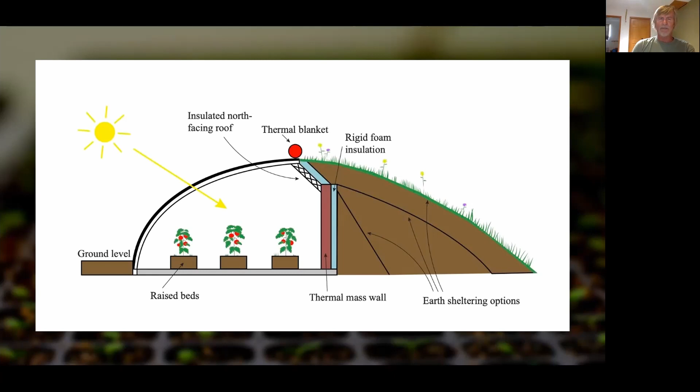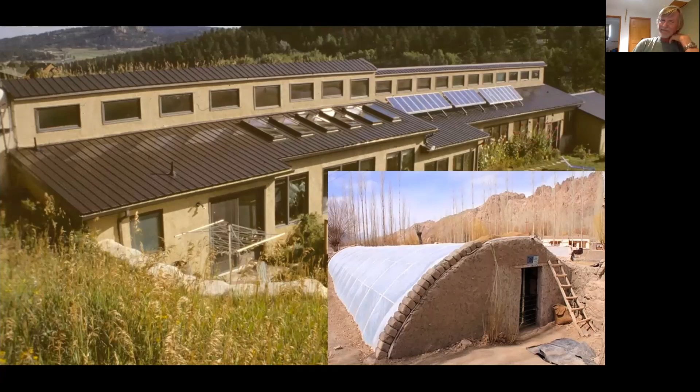So these structures are very equivalent. The Chinese greenhouse on the bottom right, and this passive solar home in Evergreen, Colorado on the left. As I said, very different from a traditional greenhouse. You really couldn't design a more energy inefficient structure than a conventional greenhouse. Maybe the only thing less efficient is a tent. They're just really not designed for energy efficiency. Most greenhouses are designed to allow people to start growing early in the spring, or maybe mid-spring, so they have their seedlings and whatnot ready to put out in their gardens in the summer. And some people grow through the summer and into the fall, but they're basically not designed for winter use without the addition of tons of supplemental heat.

So back to the Chinese greenhouse. This is really what we've just said. They're designed to grow warm weather fruits and vegetables throughout the winter, using only solar energy, typically earth sheltered. If you don't have a site that has at least a 10% slope to it, you can berm them. When you excavate, you can use that supplemental dirt to berm the structure so it's earth sheltered. Long axis oriented east and west. They're insulated at night. Now that's an important thing. So on a cold winter night, you want to be able to pull some insulation down over that glass, or in this case, under that glazing, to hold that heat in. And they're built with thermal mass to retain that heat, built airtight.

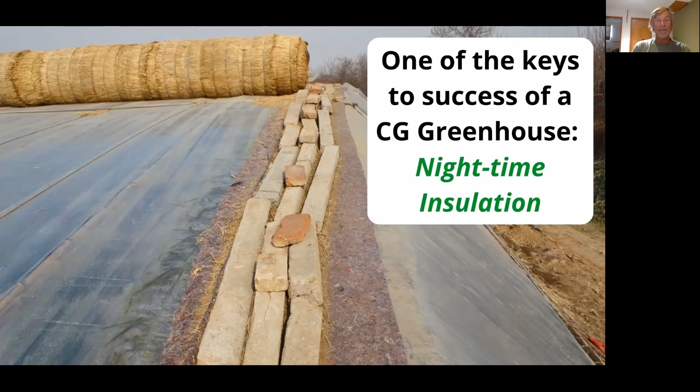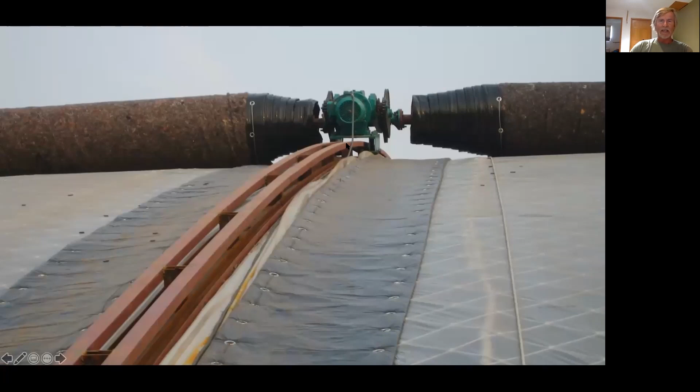And then they've gone to synthetic fabrics to try to hold that heat in. At this point, they were still manually raising and lowering them, which is a lot of work. And then they designed technology to help raise and lower that insulation blanket with electricity. Much smarter way to do it. Okay. Now, on your greenhouse, if you're going to build one, one of the things that you can do, and one of the things that we did, is you can install an insulation blanket, and we have an interior insulation blanket, but we also installed some polycarbonate.

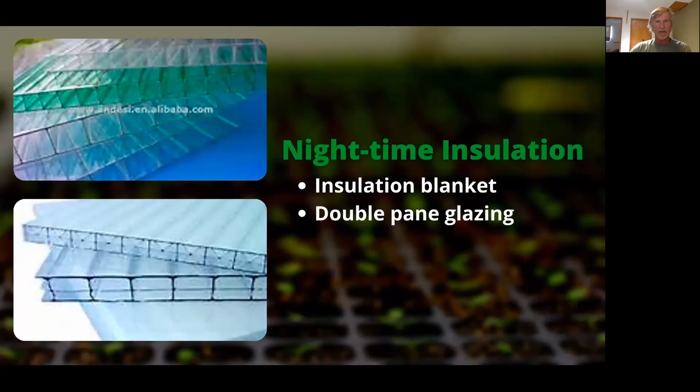Now here's ours. We basically strung an insulation material called, the one we use, the name's slipping my mind right now, Aluminet. It's an aluminized shade cloth. I think this one's polypropylene or polyethylene, treated with UV resistant materials. And what we did is we suspended it above some cable, and so we can raise and lower it. This is actually conventional shade cloth that you're looking at, but that can be lowered at night to help hold the heat in. And that's the big challenge, keeping that greenhouse warm at night.

Now, this is that Chinese greenhouse I showed you earlier, the one that was above ground, beautiful. They got a beautiful growing operation in there, but they used a product similar to Aluminet called TICS. It's Tempa Interior Climate Screen. I prefer Aluminet because there are places online where you can order it in multiple sizes. It comes with grommets, and it's much easier. This is the stuff I'm talking about. This is Aluminet. This is what I replaced our conventional shade cloth with.

It's a reflective barrier. Most of your heat loss in a greenhouse at night is infrared, okay? Infrared radiation. So by placing a radiant barrier essentially between the greenhouse and the glazing or glass or plastic, you now are able to reflect a lot of that heat back into the greenhouse. So that's really important. It's not really a great insulator in the sense of what insulation does, but it does prevent that main source of heat loss, which is IR radiation.

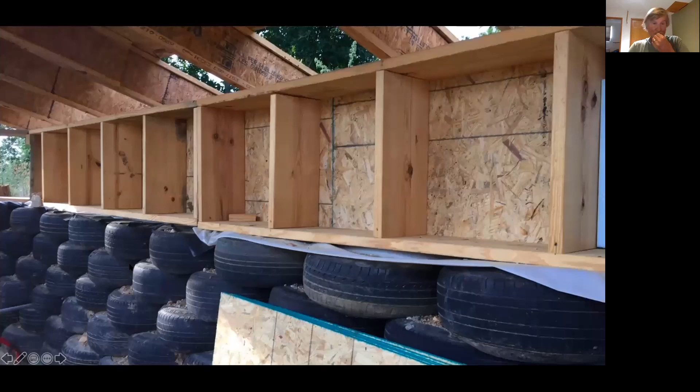Now, when we built ours, you're looking at the inside of the north-facing wall. We used rammed earth tires. My house in Evergreen, Colorado, is a rammed earth tire home. I decided, I don't know who the we is, I decided to do the same thing in Missouri. And there's a whole story behind that. It's a nice, convenient way to put tires to good use. It's a lot of work, but the work can be lessened, but that's not the point of this slide. Just to let you know, we did it this time. Were I to do it again, I'd choose another material, and I'll show you that later.

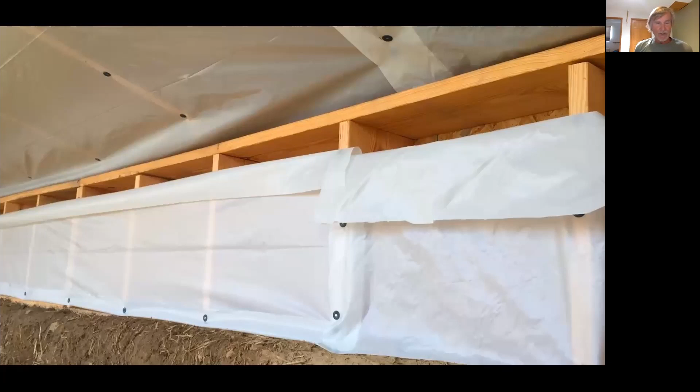But notice, this is the north facing wall, and on the outside, it's waterproofed all the way to the top and bermed almost to the very top of that wall. But that's a 12-inch deep cavity, which we packed with cellulose. We also used TJIs in the roof, which were left over from building our house. And so we have also 12 inches of dense packed cellulose in the ceiling. So once we framed it up, you can see we're starting to plaster the wall down below.

Can you see my arrow, or can you see my pointer when I point things out? Can you see that, like right on the white spot? Am I wasting my time doing that? Probably can't. And we can see it. Yeah, okay. We see it.

All right, so you can see that we've started to plaster here, but what we did is we put 2 layers of 11 mil polyethylene. We nailed it to the frame. We did the same thing in the roof, and then we packed it with insulation. Now, I also used some of this Reflectix type insulation. It's an insulated bubble wrap, essentially.

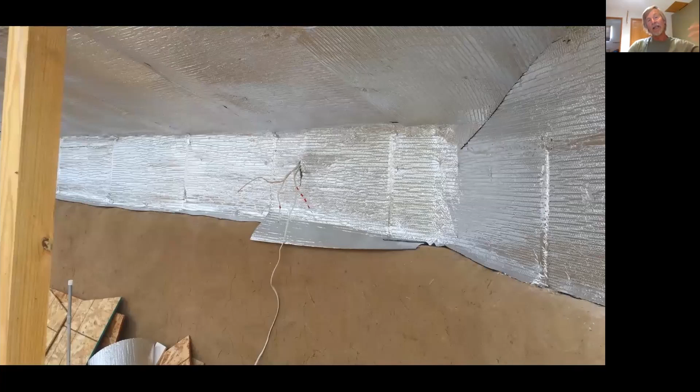So after we had filled that cavity with insulation, we applied painted OSB just to help reduce water penetration. And then we taped all the seams, and then we placed this reflective material over that to provide yet another level of insulation and some reflection to keep the back of the greenhouse brighter. So that's insulation. Basically any wall that's not thermal mass and not plastic to let light in should be insulated. And you want to insulate the glazing as well.

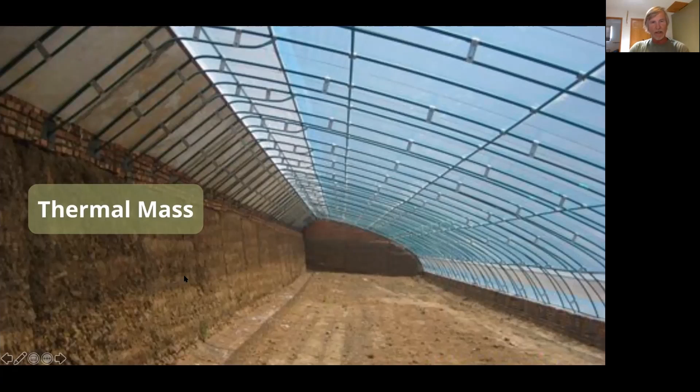Now in China, they go very deep into the earth. You can see how deep they are. I don't know, that must be 8 to 10 feet deep into the earth. And they don't typically add a lot of thermal mass. They use thermal mass from the soil, but they'll also often put a parge coat, a coat of concrete, as you can see here, over that back wall, and that serves as some thermal mass. They've got a walkway here, which adds thermal mass, and then the soil in here supplies additional thermal mass.

So very lovely structure, very, very nice way of growing food. So we decided, though, or I decided, as I mentioned earlier, to use rammed earth tires. We built this, and I can't remember when we started doing the tire packing, it was like 2016. It was just an absolutely miserably hot, humid summer. We'd start at 6:30 in the morning, and by 11, we just had to quit.

So Dan got to thinking, maybe we better do something to cool us too. So we put in an earth cooling tube. This is 4-inch PVC, and we ran it. See if I've got the pictures. No, I don't. We ran it underground about 100 feet. We got a mini excavator, and we excavated a trench about 100 feet out into a pasture, laid this pipe in it, made sure that it sloped downhill the whole way, so if any moisture condensed in there, it would drain out. And then we daylighted it out in the pasture.

And so we just did that as an experiment while we were building, and we ran a little test. It was 104 degrees out when we ran the test. We put a little solar-powered DC fan on that, and the air coming through that earth cooling tube was 80 degrees. So it really, really worked well. And as a result of that experiment, we put another one in. We installed a 6-inch earth cooling tube on the other side of the greenhouse that runs about 130 feet into another pasture, and we dug that down even deeper, about 7 or 8 feet deep.

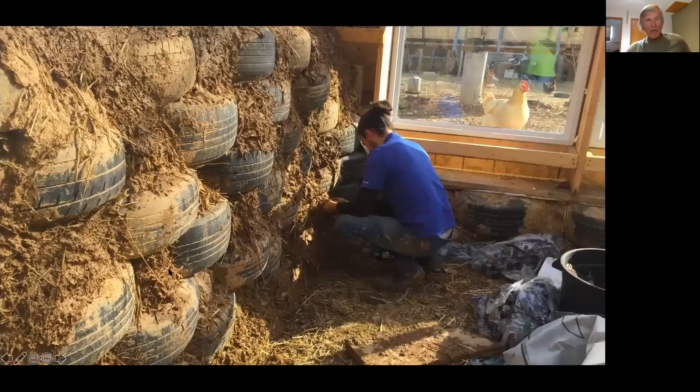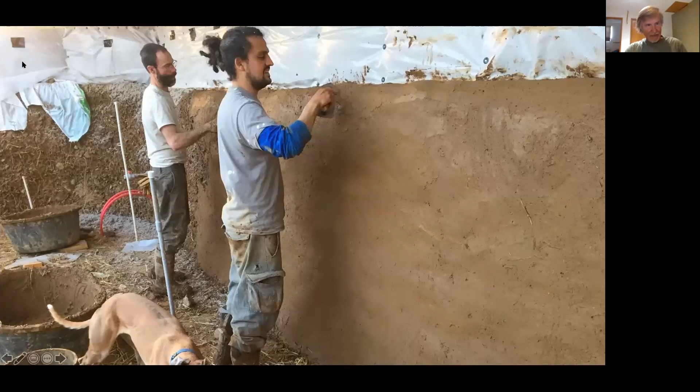Here we are. We're framed in. We've got the glass, the windows in. Notice there's a chicken always inspecting our work. And we're beginning to plaster those rammed earth tire walls. Here's a couple of my workers plastering that back wall. You can see these are all jam-packed with insulation. You can see these cavities here to the left of this other worker.

And if I were to do it again, I would probably opt for something like this. These are those monster bin blocks. Almost all concrete companies, people who send trucks of concrete out to job sites, make these bin blocks out of waste concrete. Truck comes back with a couple yards of concrete, or a half a yard. They pour them in these molds and make these lovely blocks.

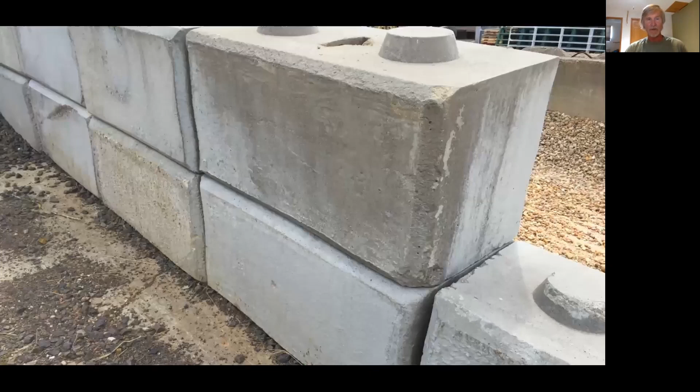We took 2 summers and part of a winter to pack those tires. There were only 200 in our structure, and I was in my late 60s, so I wasn't doing a whole lot in any one day. But we could have basically brought these in and built the walls in a week at the very most. So those are bin blocks. I'd really seriously encourage you to think about using them.

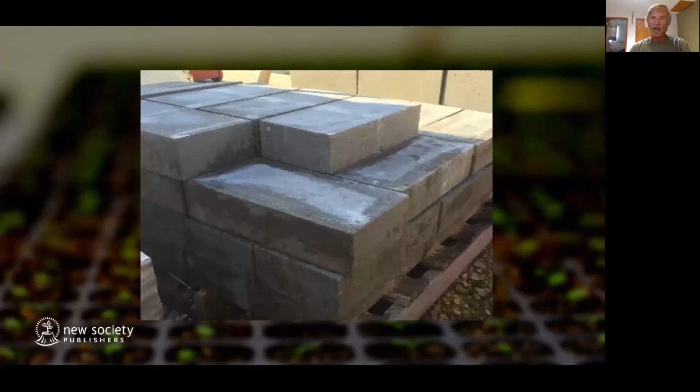You can use cement blocks. You want to fill them with a mass material, either sand or concrete, so you increase the thermal mass. You could use solid cement blocks. They're kind of airy. They're not as good a thermal mass as say a bin block. All right, so now everybody got that. So thermal mass really, really is important.

And I should mention that the reason for that is I also have 2 aquaponics systems set up in my greenhouse. So I've got 7 tanks of about 200 gallons full of fish and water and plants growing in them. And so there's a lot of moisture in my greenhouse. So I've installed a lot of DC fans to move that moisture, to move the air around. And so just keep in mind that if you start to incorporate things like hydroponics or aquaponics into a Chinese greenhouse, you'll have more moisture to deal with.

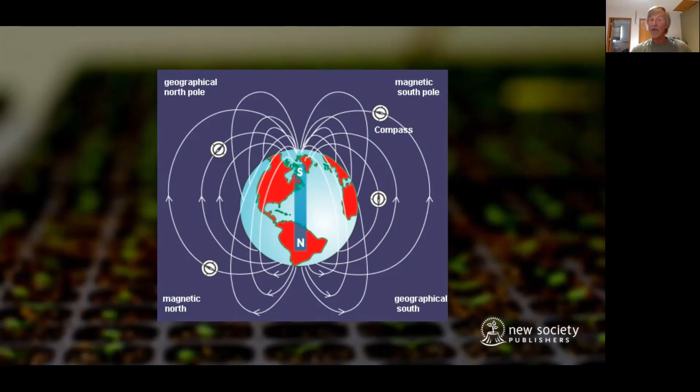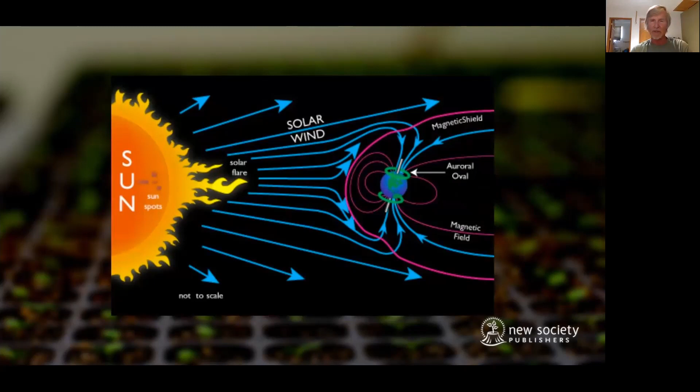So there is a North Pole and South Pole, but here's the thing, and again, I'm sorry if I'm telling you stuff you already know, but it's a beautiful slide anyway, it's kind of fun to review this, but magnetic north and south don't always follow true north and south. Okay, there's that picture showing how that magnetic field prevents us from being bombarded by this corpuscular radiation, alpha particles and whatnot. But true south and magnetic north and south rarely coincide.

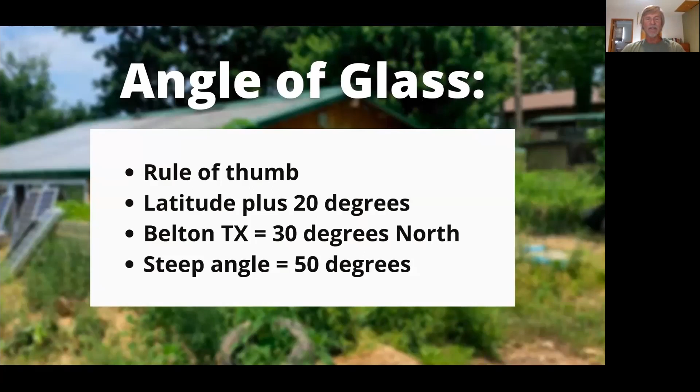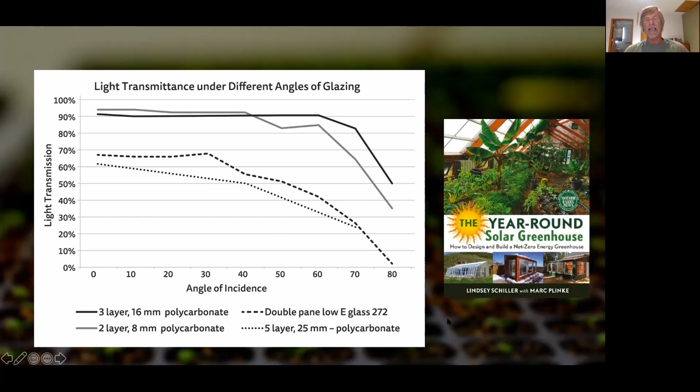Okay, now, as I mentioned, I've tried to do more with the Chinese greenhouse than just build a passive structure. I've looked at a lot of cool ways, using renewable energy to heat and cool it. I'm trying to get the temperature higher in the winter and cooler in the summer naturally. And so one of the things that we use is these structures called climate batteries, which is just a fancy term for some thermal mass that you bury in the ground underneath your greenhouse. But climate batteries sounds really fancy.

And so the way I've done it in my house, we've got an active underground underfloor heat storage system. During the day, let's deal with the winter right now, the hot air rises to the top of the greenhouse. And then I've got some pipes, I'll show you shortly, near the ceiling level.

When the sun's shining, there's a thermostatically controlled fan in the greenhouse. When it gets to about 75, 80 degrees, it turns on, and that pumps that hot air from the ceiling level down into some floor mass. Basically, it's river gravel, and there are pipes that run through this river gravel in the floor of the greenhouse.

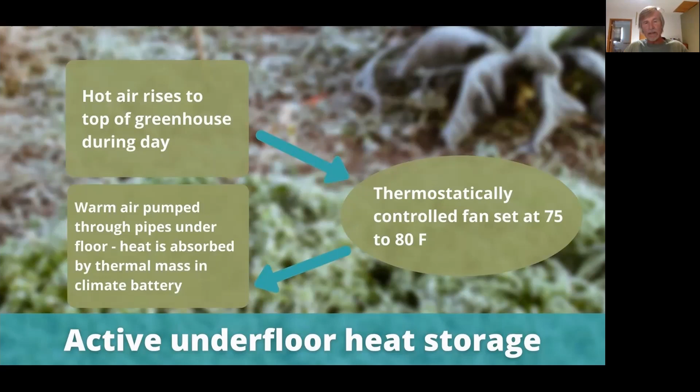And so it takes that hot air using solar powered fans and transports it through this network of pipes through this thermal mass, and it warms that up during the day. And then that heat is able to migrate up into the greenhouse at night.

So this is a real simple drawing of the system that we designed. Very, very simple. There's a whole network of pipes here on the floor. I used 3-inch PVC pipe, and I drilled some holes through it. I would strongly recommend that you use the corrugated black ABS plastic drain pipe.

And so what happens is when the sun shines, this DC fan turns on and it starts sucking the greenhouse air out of this network of pipes, drawing the air out, and that draws the hot air up near the ceiling back down through this system. So we get some really nice air circulation through there, and that keeps the greenhouse from overheating, even during the

winter, which can happen. Okay, it stores that heat in the floor, and we're not very deep there, maybe 8-10 inches down, so that heat can then migrate up into the greenhouse and help keep it warmer. Now you say, Dan, why am I trying to cool a greenhouse in the winter? The reason for that is that greenhouses can get pretty hot on a sunny but cold winter day. Take Colorado, for example,

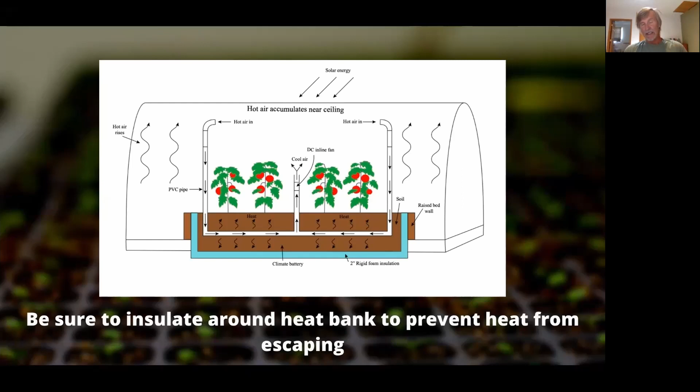What a lot of conventional greenhouse operators do is they just open windows and let that heat out. But to me, that's kind of silly. You've got this free heat. Why not just capture it, put it in the floor, put it in your grow beds, and absorb that heat for nighttime use? So that's what we do, and it works really, really well. We've started building some raised beds in there. We're going to bury some pipe in those and actually run the heat through the soil in those raised beds.

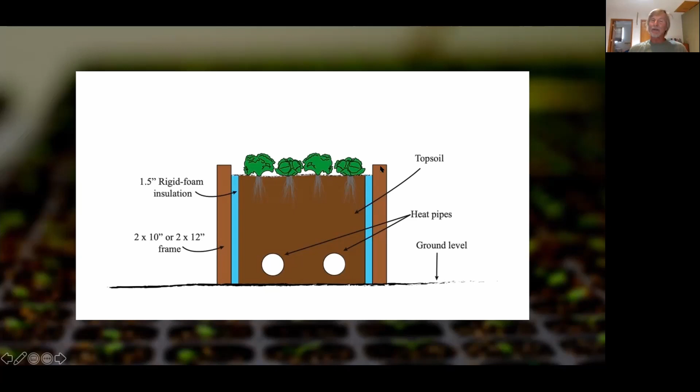Let me go back, let me just jump quickly. Oh, I forgot that slide. So then one of the things that we're going to do too is put some PVC pipe over this and then drape plastic over it during the winter to create a little microclimate, so it'll be even warmer inside those raised bed gardens.

Now we do hydroponics as well. So we grow fish in a big 275-gallon tank, fish from our pond. We have bluegills and catfish, and we feed the plants the wastewater. The wastewater then circulates through 3 other large tanks, a couple 100 gallons each, and we have plants growing in those grow beds. We've got foam rafts. The plants are in these little net pots. The roots suspend into that fertilized water, suck up the nutrients, and that forms a hydroponic system.

But the point I want to make is that if you wanted to, you could also run those heat pipes right underneath your hydroponic or your aquaponic grow beds. All right, so just as a quick summary, in the winter, the climate battery will cool it during the day and heat it at night. You're basically just temporarily storing that heat, trying to keep the greenhouse from overheating and storing that heat for nighttime use.

All right, so basically I talked all about this. One of the things that I want to point out about this climate battery is this point right here, that water vapor condenses. So remember, what you're doing in this greenhouse is pumping warm, moist air underground. And as it flows underground, it condenses. And as many of you know, when water vapor condenses, it gives off a lot of heat, okay?

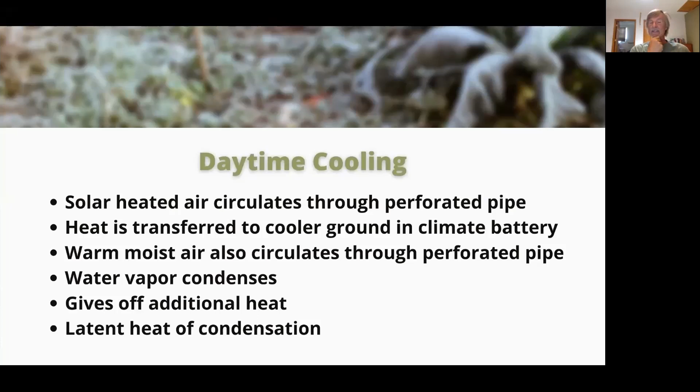The reason for that is that when water evaporates, it takes a bucket load of heat to drive water from a liquid state to a vapor, to actually propel those water molecules out of an aqueous environment into the air. A lot of calories go into that process. And when you reverse the process, when you go from water vapor back to liquid water, all that heat is given off. We call that the latent heat of condensation.

All right, so what I want to point out about that is, by doing this, you're acquiring 5 times more energy than you would if you were just taking the heat from that air and dumping it into the ground.

So in other words, by allowing that warm, moist air to condense, you're generating an awful lot more heat for your greenhouse. So this slide just explains everything I said. I kind of get ahead of myself a little bit.

It takes a huge amount of energy to go from liquid to water vapor. That's the latent heat of vaporization. And then movement in the reverse direction results in that release of energy. Pretty cool. Now you can do that in a regular greenhouse too. So if some of you aren't interested in building a Chinese greenhouse, you can use this idea in a regular greenhouse too to boost its wintertime performance. And so at night, the reverse occurs.

Now, I'm getting toward the end here, and I want to just give you a few guidelines. You need to design these climate batteries pretty specifically, and some very talented individuals have worked out the math on it and have offered these guidelines for creating an effective climate battery. One of the goals is to circulate the entire volume of that greenhouse air through your battery, through your heat storage area, at least 5 times per hour.

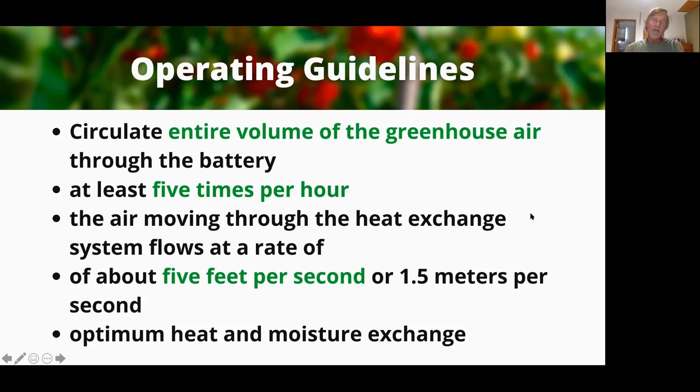And there's a lot more about the design in the Chinese greenhouse book for any of you who bought it or are thinking about it. Now, as I said, one of the things I'm really trying to do is make this Chinese greenhouse work better. So there's a couple of chapters in the book about how you could store additional heat using a solar hot water system or solar hot air system. The idea is to augment that underground network of pipes by adding a solar hot water system or a solar hot air system.

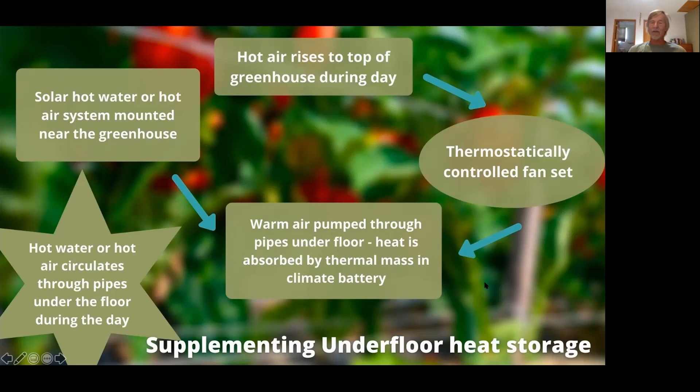And I would really suggest solar hot air as opposed to solar hot water just for cost reasons, and it's a much easier system. So we haven't done this yet, but we built our own solar hot air collector, and we're going to set it up so we can dump additional heat. This will be set up outside the greenhouse. We'll absorb additional heat on a sunny but cold winter day, and just add that to the underfloor storage system we have. We've got it all designed and ready to go in, but we haven't done it yet.

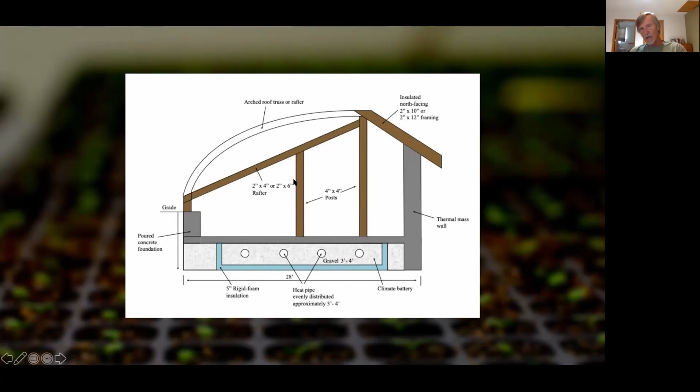So that's the design. There's the thermal mass. In our case, we actually didn't insulate under our climate battery, but for best performance, you should probably insulate underneath it. We did insulate this outside wall. We put R25 rigid foam insulation on the outside of this wall to hold that heat in.

Let me backtrack, I'm sorry. This is our diagram of our superficial heat storage. I was really hoping to be able to go deep enough to dig an entire set of pipe down below, maybe 6 or 8 feet down, to take that excess summer heat from that greenhouse and store it deep in the earth so we could use that for the wintertime storage. But we got down about 5 or 6 feet and had enough room to place this superficial collector, heat exchanger, and then we just hit solid limestone.

So we did not install a deeper one, but if you're in an area where you've got really soft soil and you can go deep, I'd strongly consider putting in a deeper heat exchanger or a deeper climate battery to take all that surplus summer heat, dump it underground, and store it for the winter use. And there's a whole chapter on that kind of system.